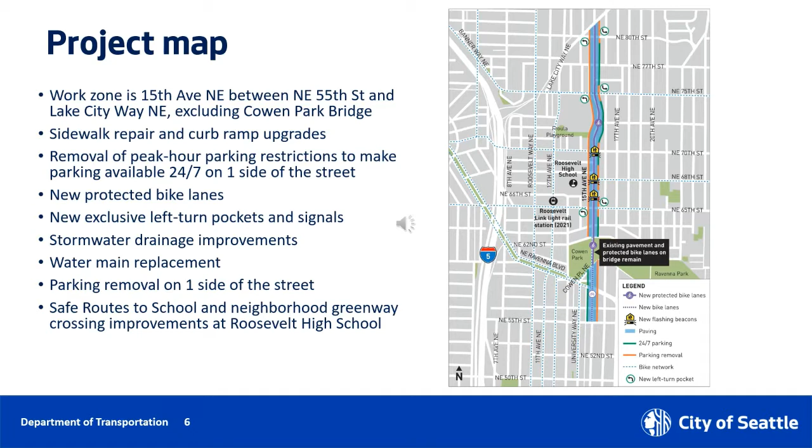As we worked towards final design, we reached out to community members, business owners, schools, and developers to gather feedback. We heard many recurring themes at open houses, drop-in events, or through one-on-one meetings. We examined those themes and were able to incorporate many community-driven ideas into the final design. Overall safety improvements were the number one priority.

To prevent collisions, people asked for left turn pockets and designated signals at intersections. We were able to provide these at Northeast 65th Street, Northeast 75th Street, and at Northeast 80th Street. Concerns for crossing at Northeast 62nd Street came up a lot from people walking to and from Cowen Park. We were able to incorporate a crosswalk at this location to improve safety.

Feedback about safety around Roosevelt High School was frequently mentioned. As part of our Safe Routes to School program, we are installing 3 rapid flashing beacon crosswalks in this area. We are also moving the bus load zones from 15th Avenue Northeast to Northeast 68th Street.

People asked for pedestrian improvements, and we are upgrading curb ramps and improving sidewalks. Safe crossings for bikes are being added at Northeast Ravenna Boulevard, and load zones are being incorporated for business needs. Parking is being maintained on one side of the street, and time-limited restrictions are being removed. Other feedback has been collected and will be considered for future improvements.

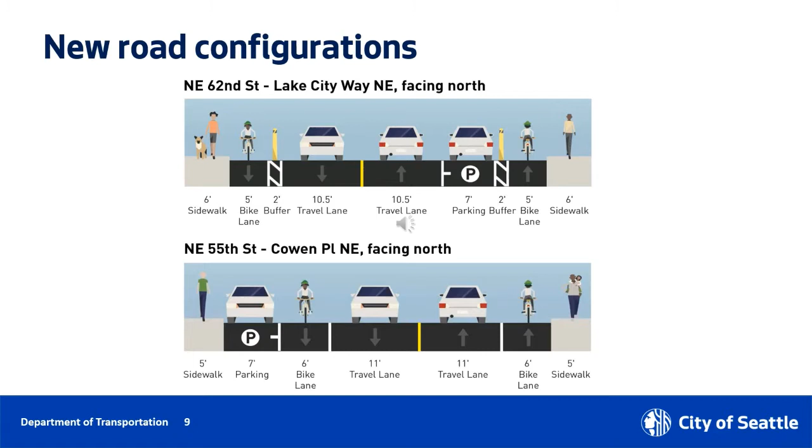The lower portion shows the work between Northeast 55th and Cowen Place Northeast. Here the bike lanes do not have protection due to the road not being wide enough to accommodate them.

Protected bike lanes provide a safe space for cyclists of all abilities. As the population rate of Seattle increases, we continue to look for ways to ease congestion and to provide transportation options for all modes. In addition to protected bike lanes, we added a painted crossing for those riding bikes at Ravenna Boulevard.

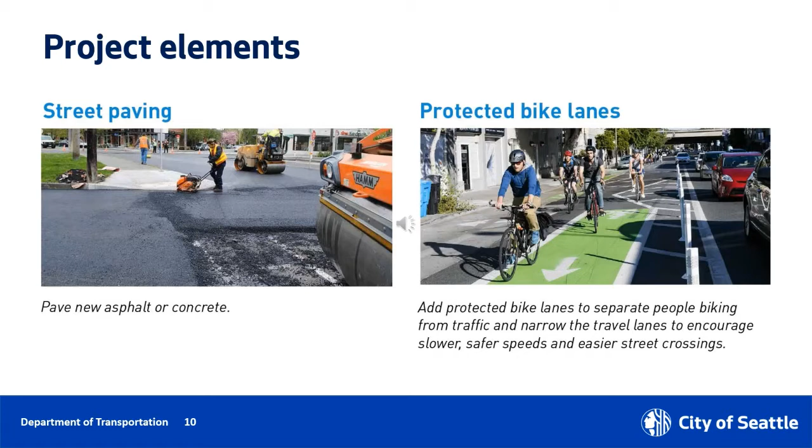Pedestrian improvements include new crosswalks near Roosevelt High School and at Northeast 62nd Street, as well as curb ramp upgrades to meet ADA standards. A part of this project involves making stormwater drainage improvements at select locations.

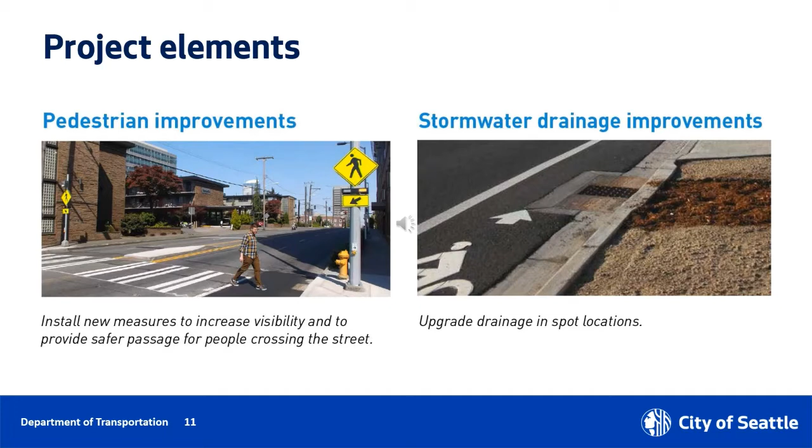We will be making the sidewalks more accessible along the project corridor with ramps that meet ADA standards. There will be impacts to parking along the corridor. We will remove parking on one side of the street and remove restrictions for parking on the side that remains.

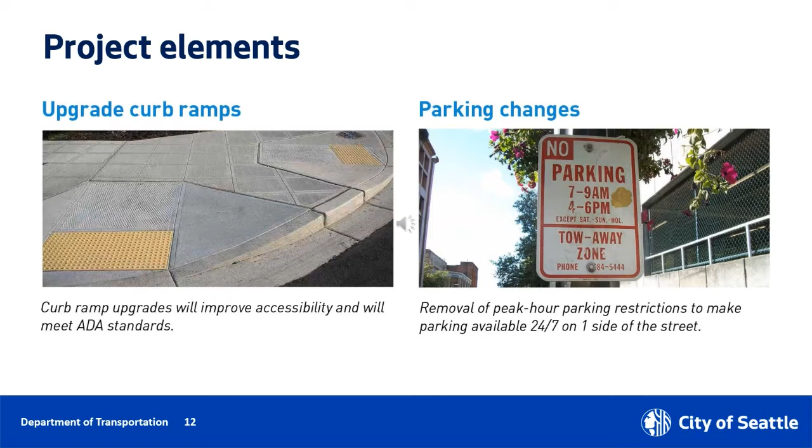The water main replacement work will require an estimated 4 water shutoffs. Seattle Public Utilities staff will coordinate with homeowners at least 2 days in advance, and we will incorporate their messaging into our outreach wherever possible. You will find contact details for SPU on our project website.

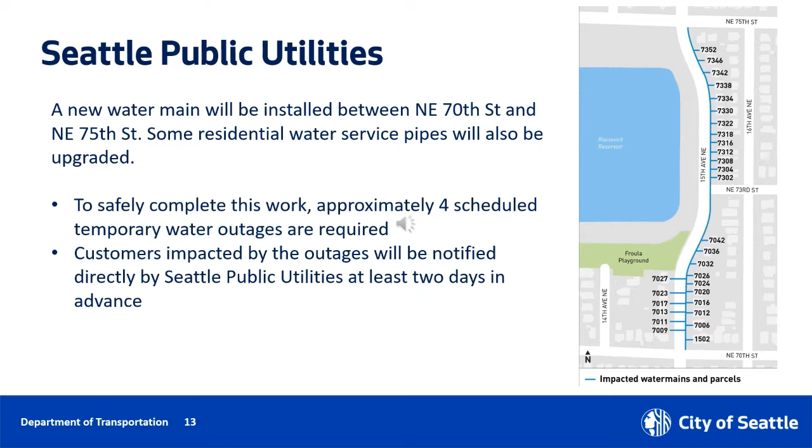As we mentioned earlier, we will be making upgrades to stormwater drainage at various points within the work zone. We will also make some changes to side sewers for 3 homes. We will coordinate with all homeowners affected by our work well in advance.

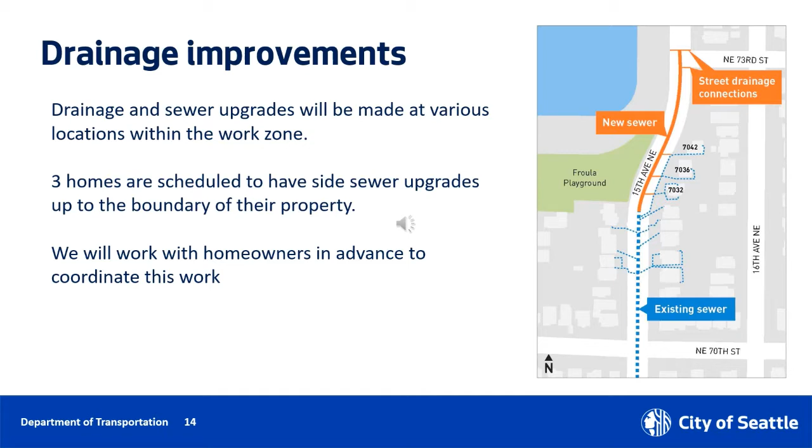During construction, we expect regular hours to be 7 a.m. to 5 p.m. with some setup and takedown either side of that. If we must work outside of these hours, we will let you know through our email updates. If you have not done so, please sign up for the project email list on our webpage. Details of that page will be shared at the end of this presentation. Other impacts of our work may include noise, vibration, dust, debris, staging near work areas, street and or lane closures, and detours for pedestrians.

During construction, we expect regular hours to be 7 a.m. to 5 p.m. with some setup and takedown either side of that. If we must work outside of these hours, we will let you know through our email updates. If you have not yet done so, please sign up for the project email list on our webpage. Details of that page will be shared at the end of this presentation. Other impacts of our work may include noise, vibration, dust, debris, staging near work areas, street and or lane closures, and detours for pedestrians.

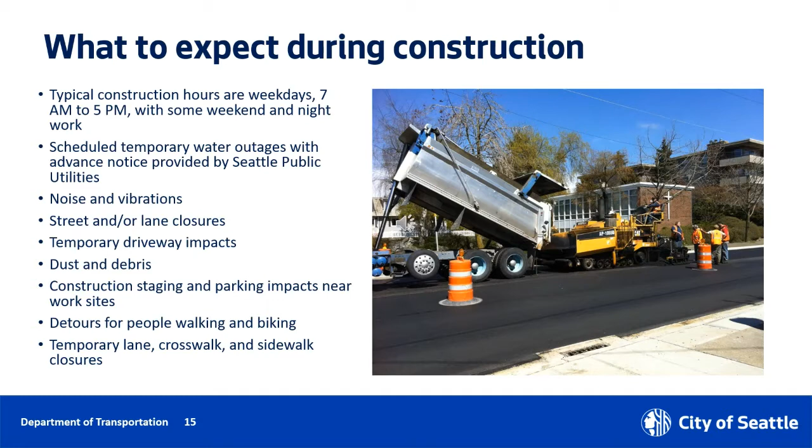Our outreach team will be available throughout construction to answer questions. We will provide advance notice of work through our project emails. So again, we encourage you to please sign up. We will work with community members to share information with those living in or traveling through the work zones.

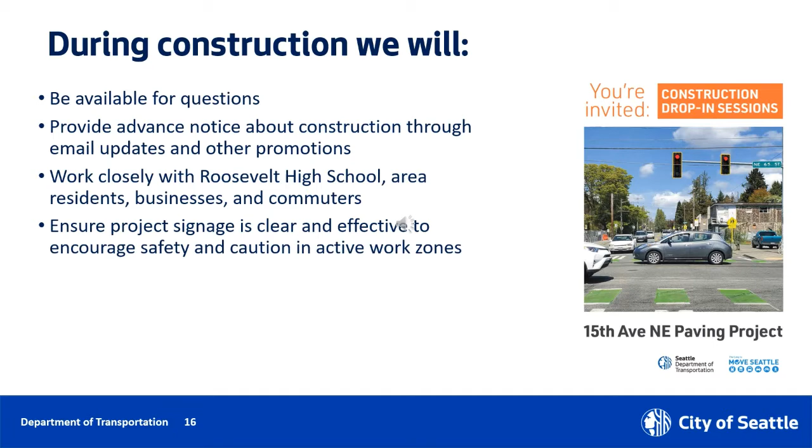At this time, we anticipate that construction will begin in September of 2020, and we expect work to be completed in early 2022. We are currently working with our construction team to determine what part of the construction zone will be our starting point. We will let you know once we have that information.

We will provide this information via weekly updates through our project emails, so please subscribe to those on our webpage. We will also add updated information to our webpage on a weekly basis.

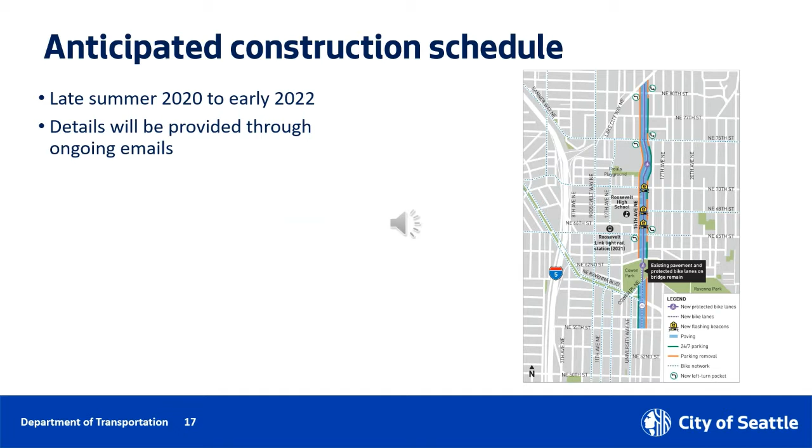There are many ways to contact the outreach team during construction. You can email us at 15th Northeast Paving at seattle.gov, or call our construction hotline at 206-775-8718. Contact information can also be found on our project webpage, which is seattle.gov/transportation/15th Avenue Northeast Paving.